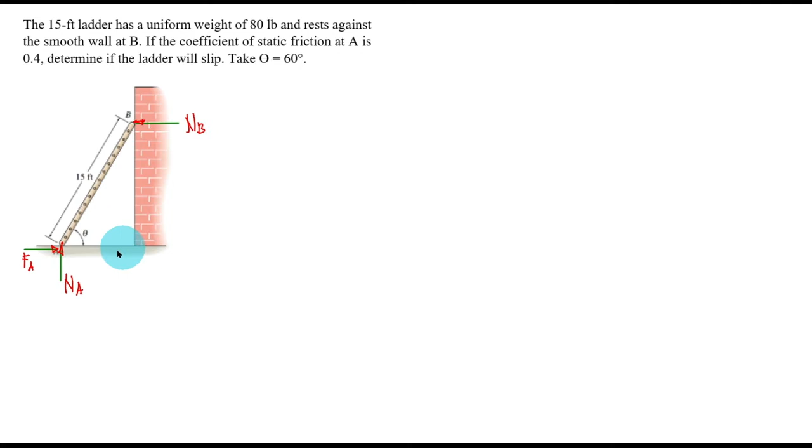Determine if the ladder will slip. So take theta is equal to 60. So ito ay 60 degrees.

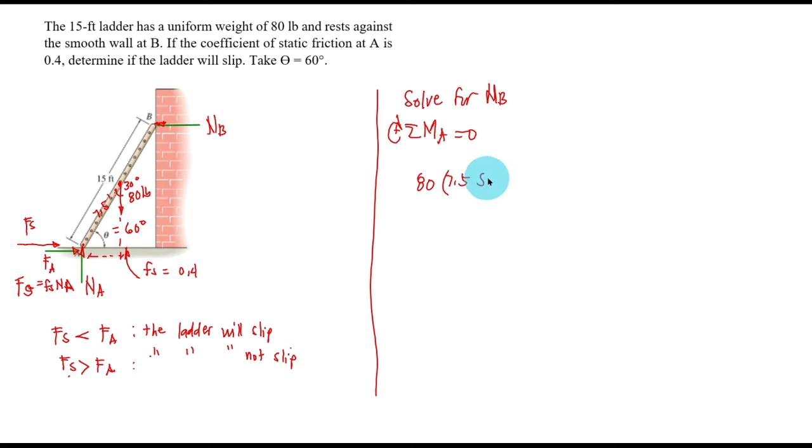So we take summation of moment at point A equal to 0. So clockwise, positive. So clockwise yung 80. So 80 pounds multiplied by yung kanyang moment arm. So ito kalahati ng 15, so 7.5. So therefore ito ay 7.5 multiplied by sine of 30 degrees. Okay, so minus yung NB. And then yung moment arm ng ating NB, yung length na to, so yan ay 15 sine of 60 degrees. Okay, so equal to 0. So this is equal to 23.1.

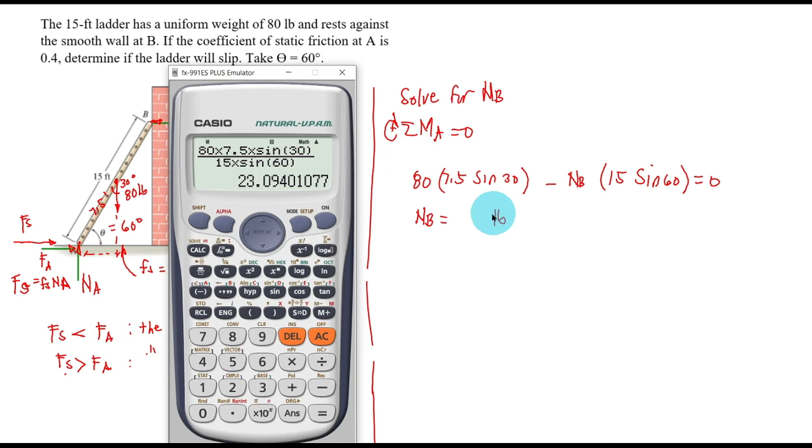So ngayon, pwede naman na nating i-solve yung F sub A. So summation of forces horizontal equal to 0. So F sub A minus NB equal to 0. So yung F sub A equal lang sa NB which is equal to 23.1 pounds. Then next, we can now solve for N sub A by taking summation of forces vertical equal to 0. So NA minus 80 equal to 0.

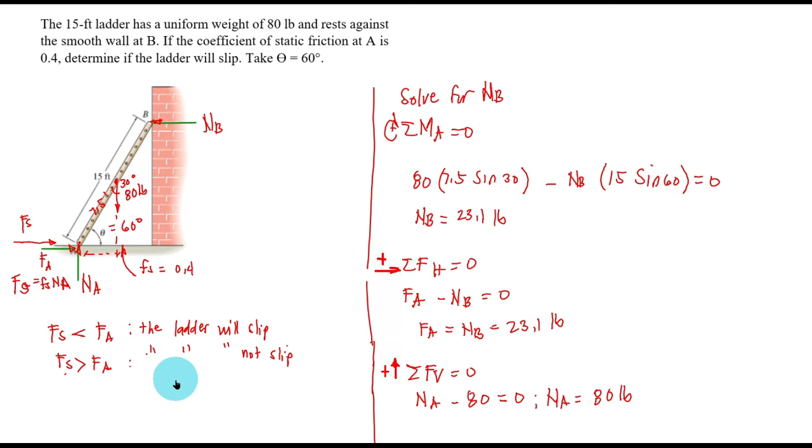Okay, so yung F sub S is equal to 0.4 multiplied by 80. So this is equal to 32 pounds. So yung F sub S natin ngayon, 32 versus yung F sub A na 23.1 pounds. So since yung ating F sub S ay greater than sa F sub A, which is 32 greater than 23.1, so the ladder will not slip. Okay?

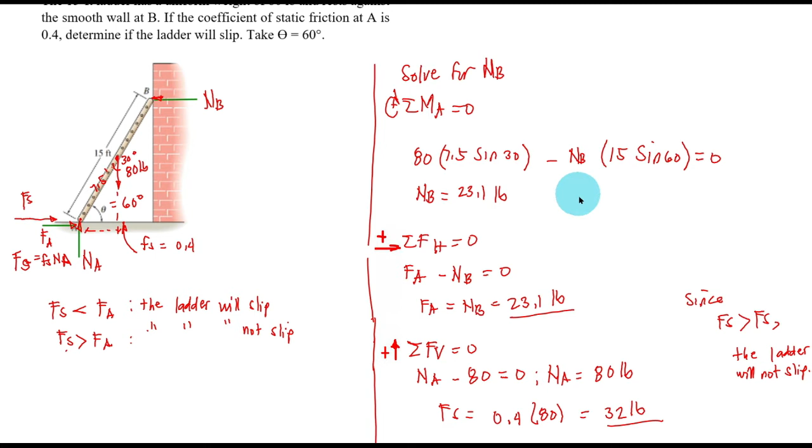Okay, for our last problem under friction, from the book of Hibbeler again, the uniform dresser has a weight of 90 pounds. So ito yung uniform dresser. Ang weight niya ay 90 pounds. And rests on a tile floor for which μs is equal to 0.2. Ibig sabihin yung coefficient of static friction.

If the man pushes on it in the horizontal direction, ibig sabihin ang theta ay 0. So ito horizontal. Determine the smallest magnitude of force F needed to move the dresser. Although nakalagay needed to move the dresser, nakalagay din smallest. Ang motion nito ay impending. Also, if the man has a weight of 150 pounds, determine the smallest coefficient of static friction between his shoes and the floor so that he does not slip. Again, impending motion din yung ating man.

So, i-drawing muna natin yung FBD, syempre. So, ito yung dresser na 90 pounds. Ang direction of motion nito ay pakanan. Although impending motion, ito yung force F. Horizontal, yung theta is 0. Therefore, yung ating Fs, pakaliwa. Kokontrahin niya itong F. So, let us denote yung friction force dito sa uniform dresser Fs prime, tapos N prime para dun sa normal force.

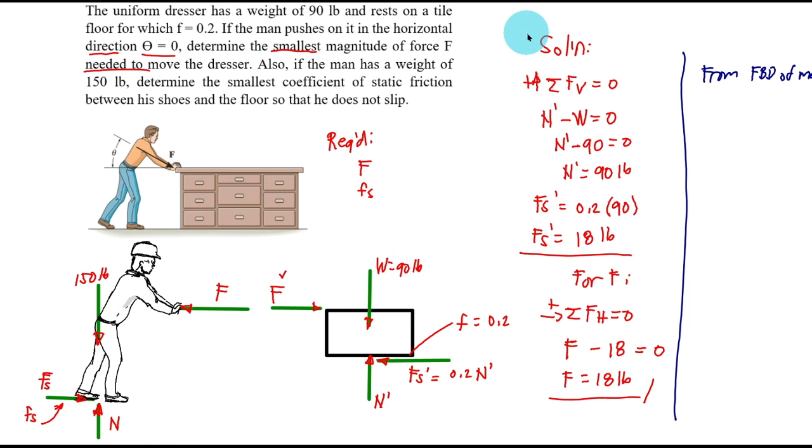For us to solve the coefficient of static friction, we need to consider yung friction force, tapos yung normal force. So ano bang kailangan natin dito? Kailangan natin yung normal force, kasi masusolve lang natin yung μs from the formula: friction force is equal to μs multiplied by the normal force dito sa man. Wala pa tayong N. Yung Fs, masusolve natin pag nag-summation of forces horizontal tayo. So unahin natin i-solve yung normal force.

By taking summation of forces vertical equal to 0, upward positive, N minus 150, yung weight ng man, equal to 0. So N is equal to 150 pounds. Then next we can take summation of forces horizontal equal to 0. To the right positive, we have Fs minus F. Yung F natin, alam natin ay equal to 18 pounds.

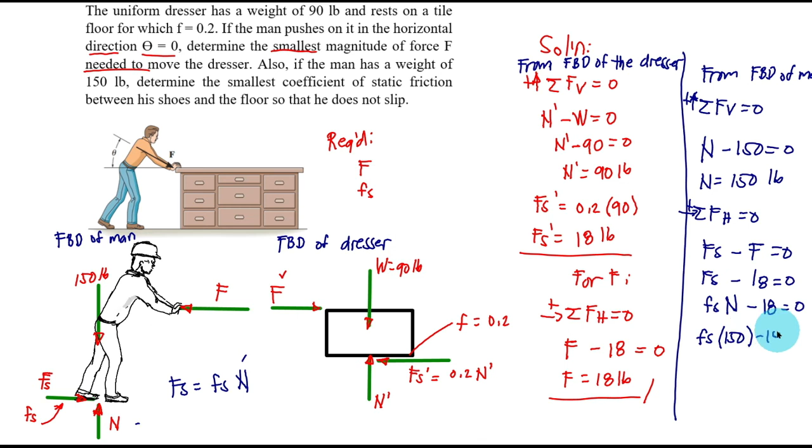Then yung Fs, we can replace this by the coefficient of friction: μs multiplied by N. Pinalitan na natin ng coefficient of friction multiplied by the normal force. So minus 18 equal to 0. Normal force is 150, so μs multiplied by 150 minus 18 equal to 0. So ang coefficient of friction ay simply 18 over 150, which is equal to 0.12.